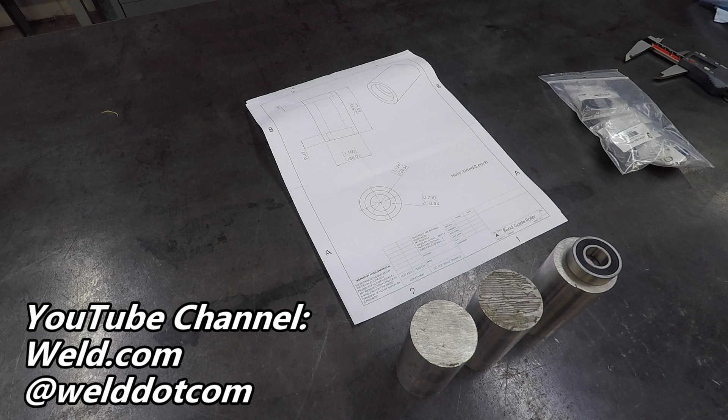All right, we've got another collaboration project. This is one I'm doing for weld.com, the guys over there. We've got 3 pieces here to machine, and what they're building is a guided bend test machine. This is going to be for bending test coupons, test weld coupons.

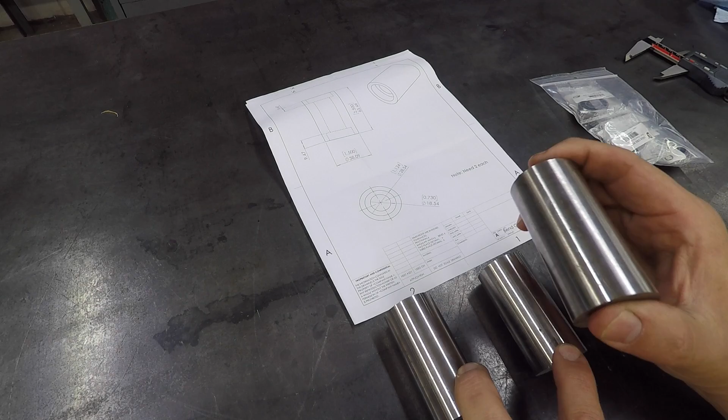What they're going to be doing is they'll have 2 of these pieces on the bottom, and they will roll. We're going to have bearings inside there, and then the top piece we're going to mill a flat on, and it'll be welded to a piece of square stock attached to a hydraulic ram. So what will happen is this will push down, the coupon will be sitting in there, your flat piece will be sitting there, and then this will come down and bend it.

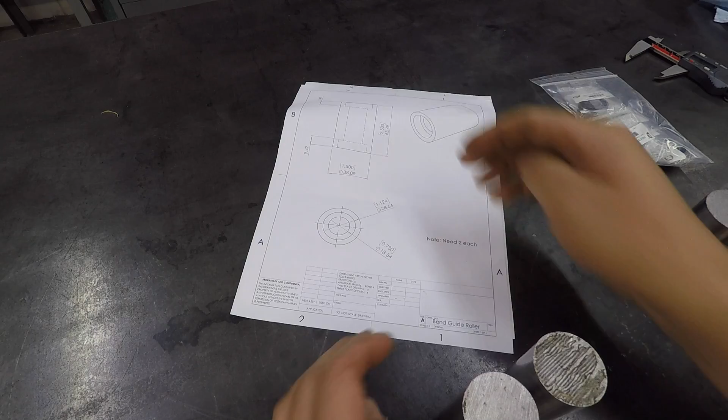So we are going to be making the rollers for them, and they supplied the print with all the dimensions right there, the length. We're going to be making it 2.5 inches long, and then it'll be counterbored on each end for the bearing. All right, pretty simple, straightforward machining.

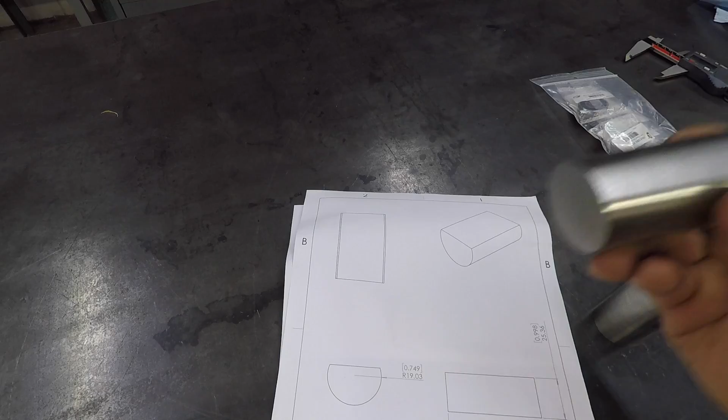And then we've got one more piece. This is going to be for the fixed roller, which will be welded to the piece of flat bar. So we're just going to set it up and mill it so that it's got a flat, and face it to length. That one's pretty simple, quick and easy to do. I might even upset some folks and go over to the shaper and use the shaper to cut the flat on there. So that's it.

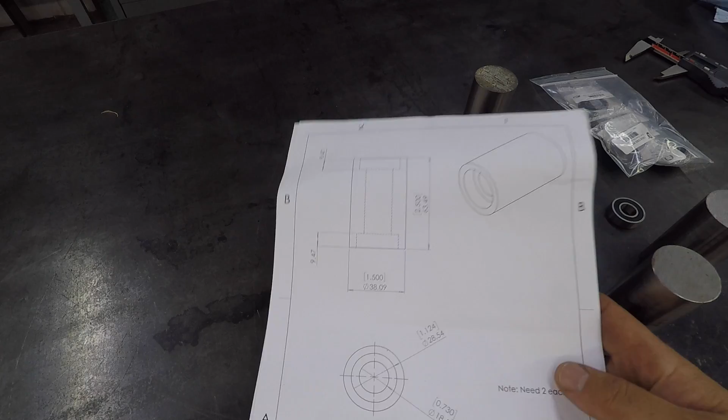Pretty easy stuff. I've had this for a little while, so I need to go ahead and try to get it knocked out so that they can finish fabricating the bending machine.

First op we're going to do is go ahead and get them all faced to the proper 2.5 inch end length. My edge chuck parallels won't actually fit in the 6 jaw right here because it's closing down too small to use that. So I'm just going to use a regular milling machine parallel for the mill vise. I'll lay it in there before we do each one, and we'll push the piece back against that parallel, snug up the chuck, and slide it back out, and I'll do that every time.

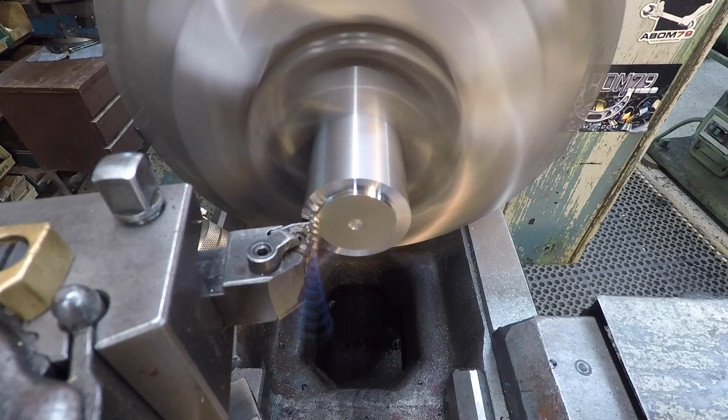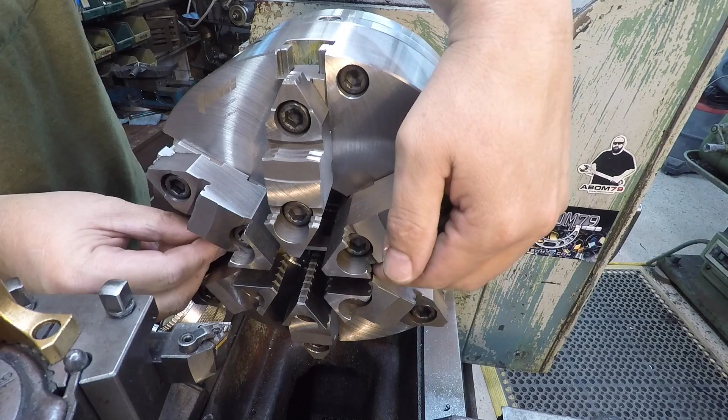So what we'll do is just make one cut across all 3, and then we'll flip them around and finish them to length. We'll make one cut across it just like so, and then we're going to stick our parallel in there again. And then I evenly tighten the scroll chucks like that. All right, ready to make another cut.

Got one side of all 3 of them faced now. I'm just going to take a rough measurement. We're still right at 3 inches, just a little bit over 3 inches. We got a crooked cut there on that end, so they're not going to measure all equally.

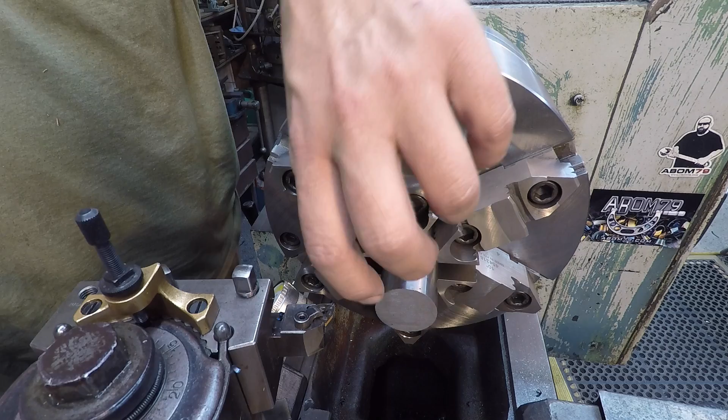But I'll just repeat the exact process that we just did with the parallel here, and just slide them in. What I'll probably do... oh, forgot to take my parallel out there. I was getting ahead of myself. What I was saying, since I've got a half inch to take off this, I can't take all that at once anyway. I'm going to get this one close. I'll pull it back out, measure it, make sure we get the first one on an exact length that we want.

And then I'll have this zero set right here, and then I won't touch it. I'll know I can come into this zero for the other 2. All right, taking sixteenth passes across here.

All right, this first one, we've got it near our length that we want it. Got a little over. I've just been using my hook scale to get me close. So, using the calipers, says that we've got 25 thousandths to come off of it. So this is going to be our final zero set right here. We'll put our parallel back in there.

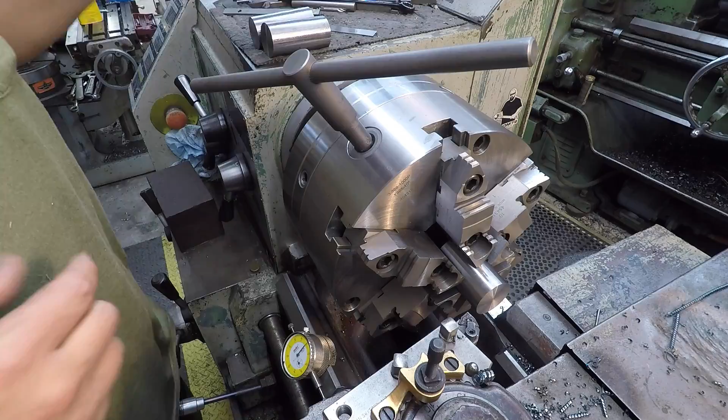Lightly push it against the parallel. Make sure we pull the parallel out that time. All right. So I'm going to move it over another 25 on the dial right here, and I'm going to reset this one to zero. And what I'll do is I've got another mag base like this that I'm going to put on the other side to use to count down to our zero here.

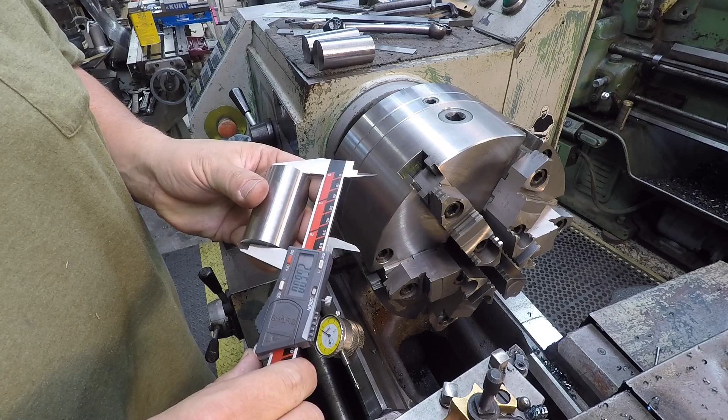Here's our first one that we finished to size. And you can see, using the calipers and the dial indicator, I'm within 1/1000th. Not that that dimension is all that critical, but we know we hit it within 1/1000th there using a caliper anyway. So just going to go ahead and repeat these methods.

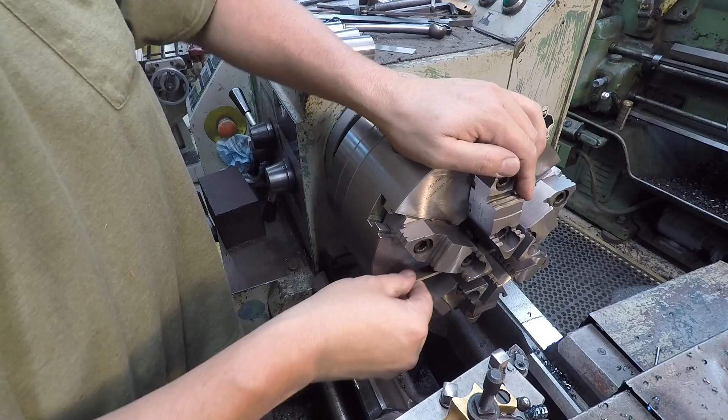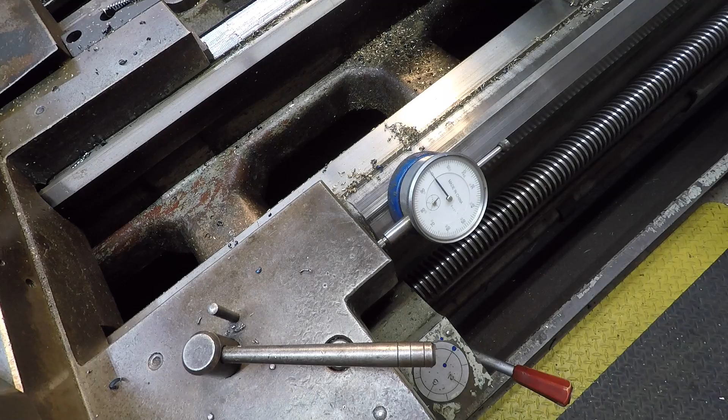As we said, we'll go ahead and stick our next one in there. Saw cut out. And I just got to get another indicator set up on the other side of the carriage here. Touched off the end of the part, got this preloaded, set to zero, so we'll just make our 16th offset and use this to move it that way.

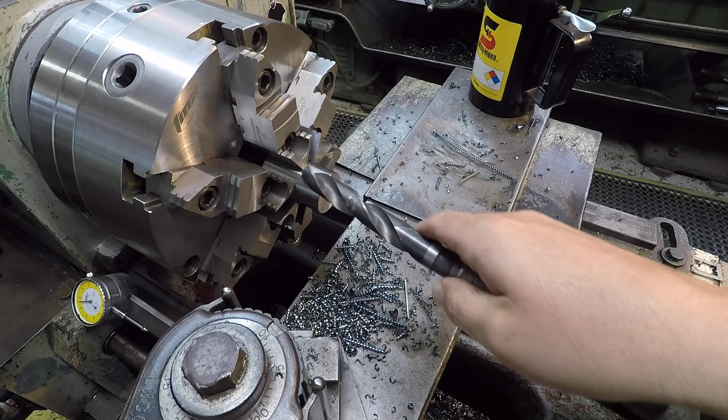Alright, so we got all of our parts faced to length. I went ahead and chamfered them also. So on 2 of them, we're going to go ahead and put our through hole in there. And what we'll do is we'll pilot it with a 3/8 drill through there. And then we're going to drill it with a 47/64 - I just put a fresh grind on that using the Lyle drill grinder. So that'll just be a drilled through hole, and then we'll counterbore each side for the bearing.

Got both of our 3/8 holes through there, so we're going to go ahead and go with our 47/64 now.

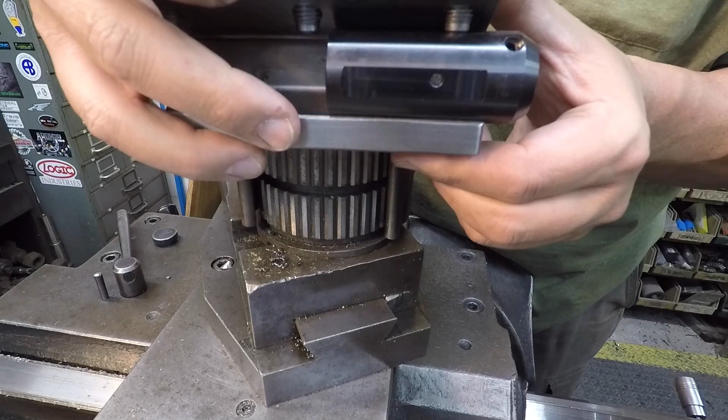All right, for our boring tool today, we're going to be using the Micro 100 Micro Quick tool holding system here, and I've got this little boring bar we're going to use. We're running the 1/2 inch shank tools. This is the one - you push it in there and that pin that's in the back right here actually squares the tool up. And then you tighten the set screw and it just seats it in there and keeps it in place.

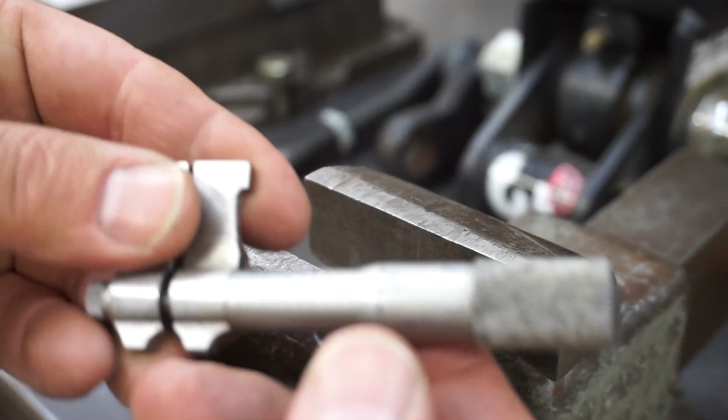This is the mic that I'm going to use today to get the bearing journals bored to size. This was my granddad's - you can actually see his initials right there, JAB. This is a 1 to 2 internal micrometer right there. So I'm going to inspect it and make sure that it's still on.

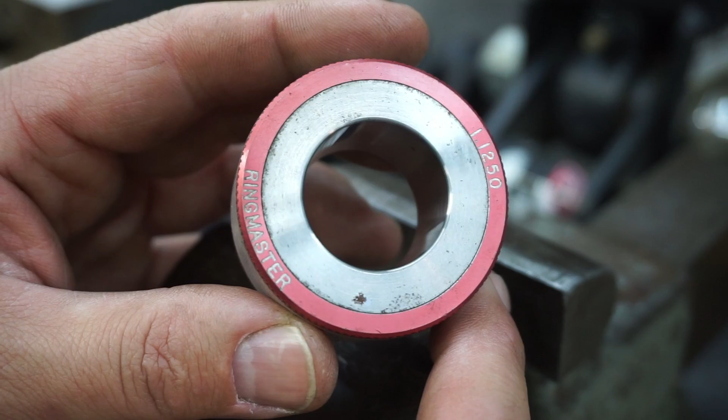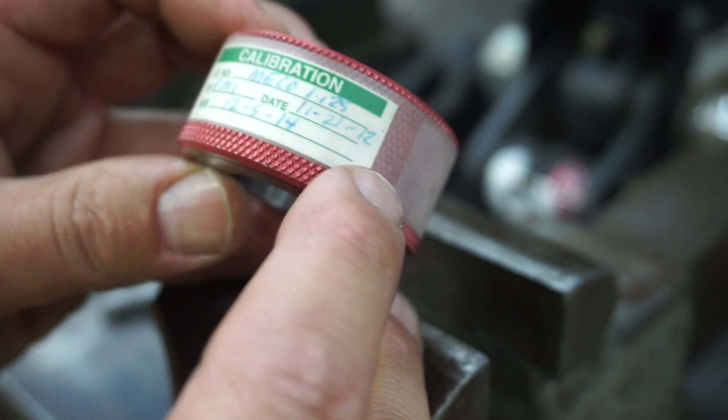I've got this Ringmaster ring gauge here that is the perfect size for that mic. You can see the size right there, 1.1250. These are standardized, you know, so it went out of calibration back in, what, '14, but it's probably still good. So we're going to go ahead, and I'm just going to very lightly clamp it in the smooth jaw right there just to hold it in place.

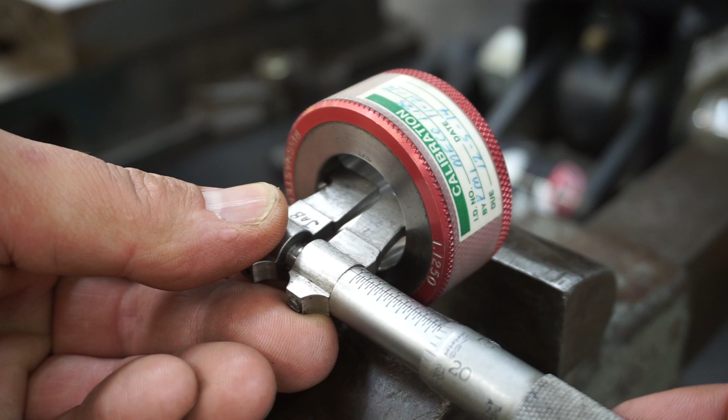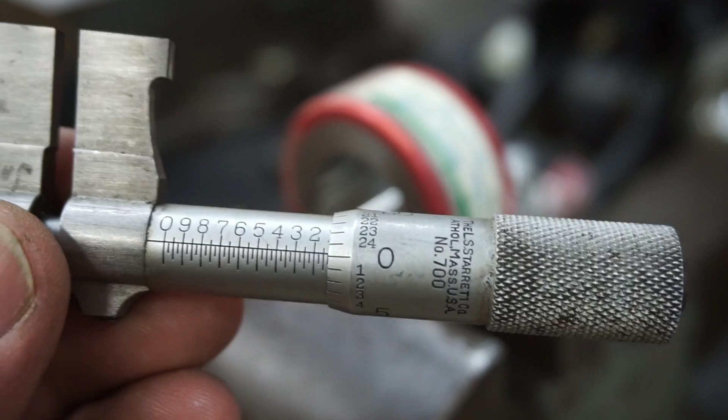We'll go in here with our mic. I don't have any rock there and it's sliding out. So we want 1.125 - it looks like we're right there on it, maybe a couple of tenths shy. Let me try it again and see if I got it right there. When I do this, I'm trying not to look at this zero. I'm not trying to line it up because I want it to line up. I want to get the right feel for the mic inside this ring gauge right here, or standard.

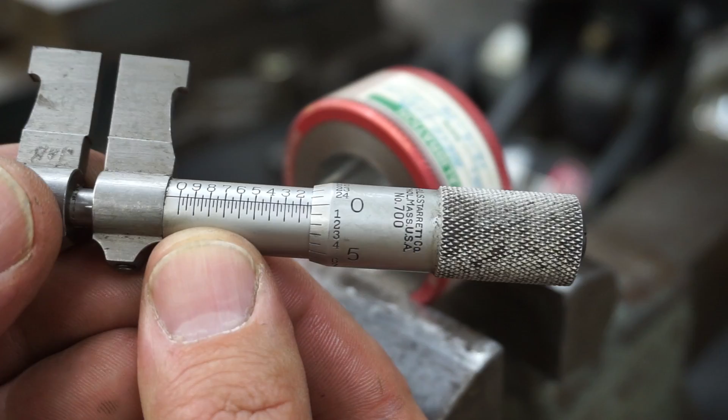And I can move it in and out right there. Let's see what we got that time. So it looks like it's pretty close to zero that time. We may be 1/10 off, but we are pretty good. We're going to go ahead and call this one ready to roll. So we'll go back to the lathe and start getting our piece bored for our bearings now.

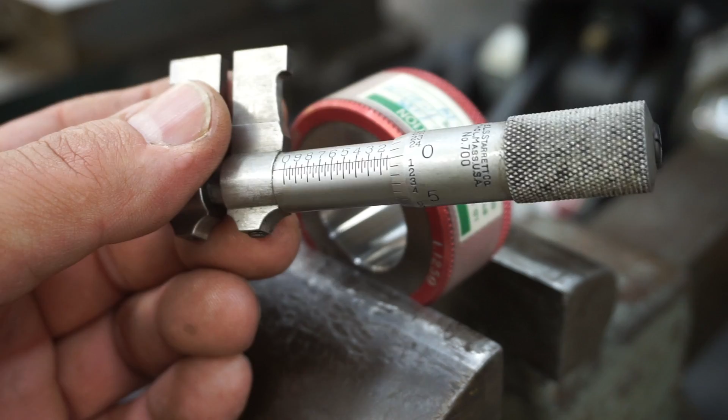All right, we've already got a depth established, so we're going to go 9.47 millimeters deep, or 373 thousandths, right at 3/8. We are ready to go here. Let's see how our micro tool is going to do.

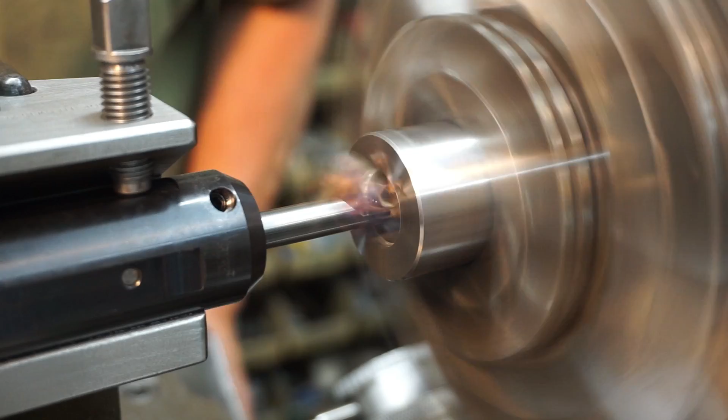Taking 50 thousandths cuts right here. Such a short journal - I'm not overly concerned about that stringy chip, you know, because we don't really have much chip grooving profile ground on that tool. But it looks like it's doing a good job, so I'll just take some cuts like that to get it about down there to size.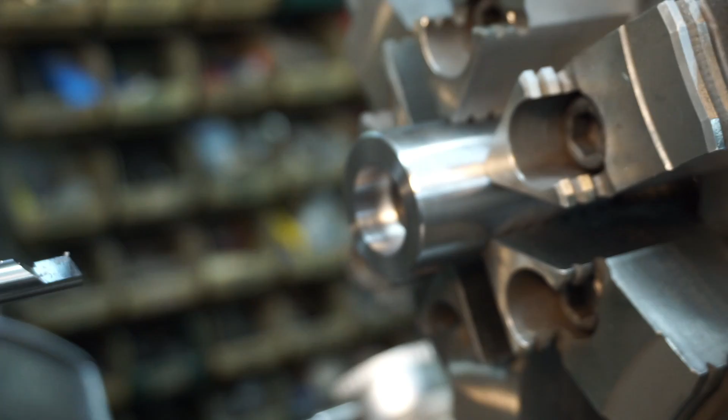I may need to get in there and pull those chips out, but they're going up inside the spindle. So yeah, we're going to be close to 950. Still got a little ways to go here.

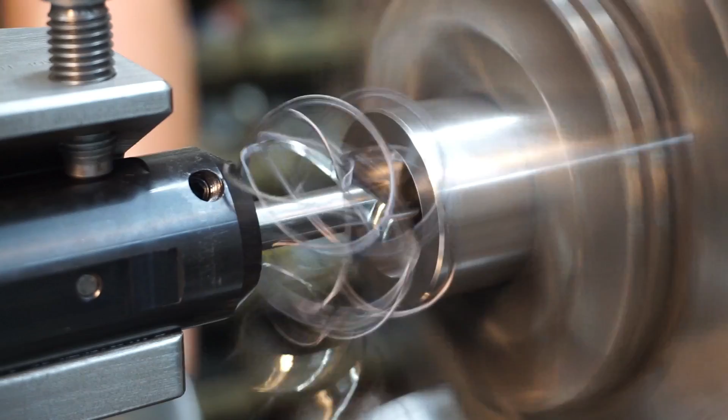All right, we should be sneaking up on our finish here. Let's see about where we're at. So it looks like we're at 1 inch 103, so we got 22 to go. We want to finish it at 1.124 to 1.124 and a half. We want just a little bit of interference so that the bearings actually press in there, so a little bit to come out.

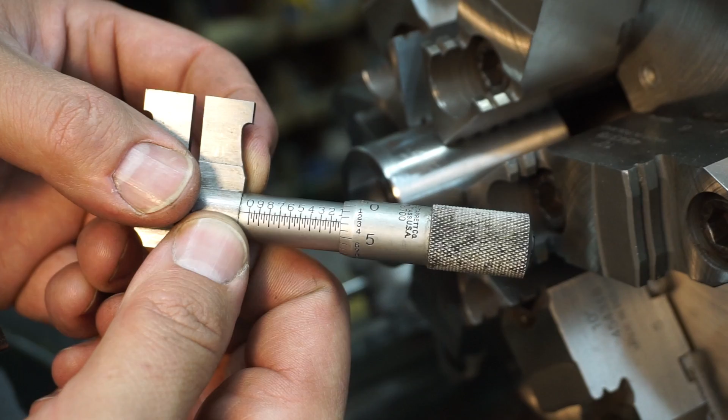I think I'll split it. We're just going to do a 10 thousandths cut here. We'll mic it and then we'll finish it, put it on our finished size.

Just want to get rid of the little fuzzy chips out of there so you're not micing on them. Alright, let's see what we're getting this time. We'll take a couple measurements just to be sure that we know where we're at, just trying to get the mic squared up both ways. Alright, looks like we're gonna have 10, 11 thousandths. Yep, looks like we got 11 thousandths to bring us on our size that we want.

So let's go ahead and take it. It'll be right there, maybe a couple tenths off. And I'm going to go ahead and clean up that face while we're in there. I left myself 4 thousandths to back face it. Like that right there.

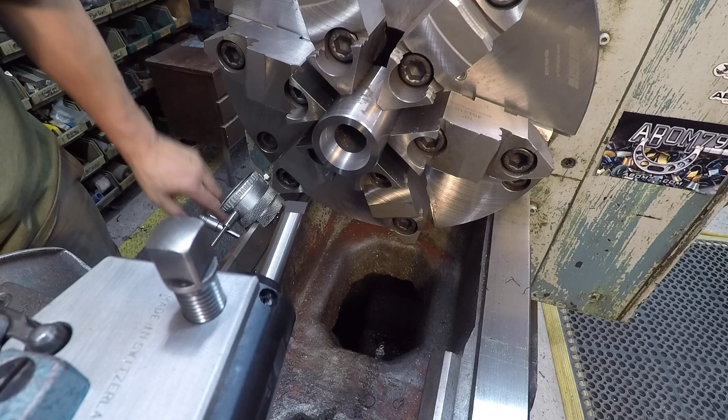The only thing left to do, we need to go ahead and put a chamfer on there. We need to chamfer this and that inner bore to get rid of that sharp edge. All right, we swapped out my boring bar for a threading tool and got it kicked around a bit of an angle. We'll go in there and use that threading tool to break that edge. I'm actually contacting Micro 100, looking at their catalog to see if they make an actual chamfering tool so we have like a 45-degree angle where you can just stick it in there, leave your tool set where it's at to be able to come in and break those edges.

Just want to knock the sharp corners off is all we're doing. Just like that. So we'll go ahead and take this guy back out.

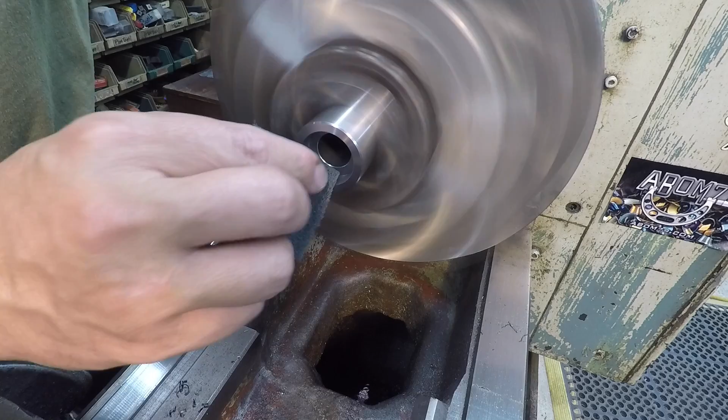One last little thing, we'll take this gray Scotch-Brite and just kind of soften up that chamfered corner, just like that. Clean the face up, make it look nice and pretty. All right, and that is finished up right there.

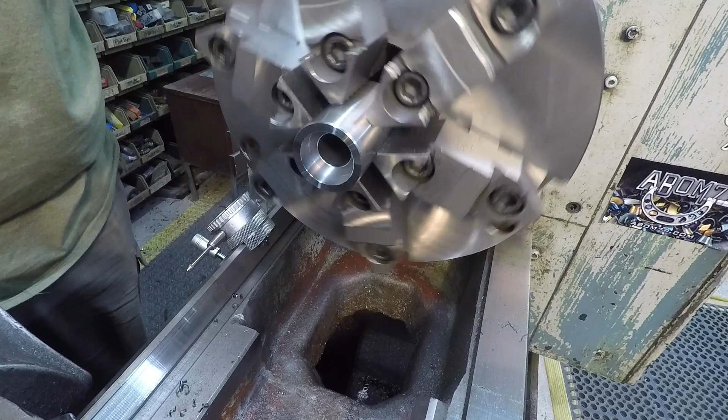So, not going to bore you with repeat steps. What we're going to do is take the part out. We're going to flip it around, and I'm going to keep doing the same thing 3 more times that I just showed you right there. So I'm going to bring it back whenever we get to the other. This piece here is the one that we're going to mill the flat on, so I'll bring you back whenever we get to the shaper, okay?

I'm just getting to the last hole. I got to flip it around, but I wanted to show, see, another benefit of having these types of small carbide boring tools is you can easily touch them up yourself. So I noticed on this last one, it was starting to squeak a little bit more on me as I was finishing it out, and after I finished it, I pulled it out, and I could tell that the corner had started to get burned a little bit.

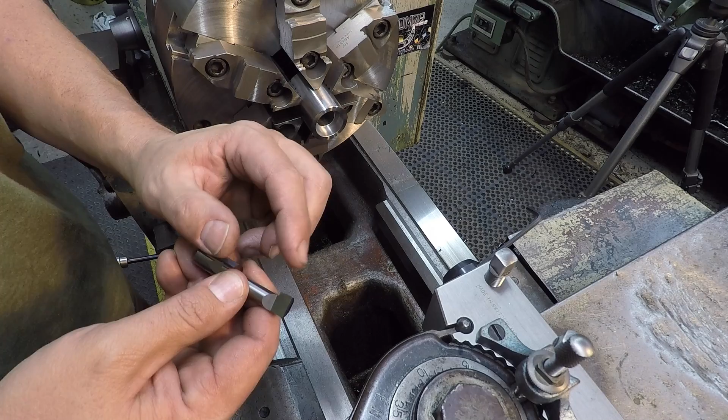You know, it was rolling over, so I went over to the Baldor carbide grinder and touched up this edge. I just went against this face to bring this edge further in. I didn't touch this face here or the top. So I just relieved this and then broke the corner again. So that's just one of the benefits of having that solid carbide.

You can go over there and, if it gets dull, which is usually just a corner, you can go touch it up yourself and then keep on going.

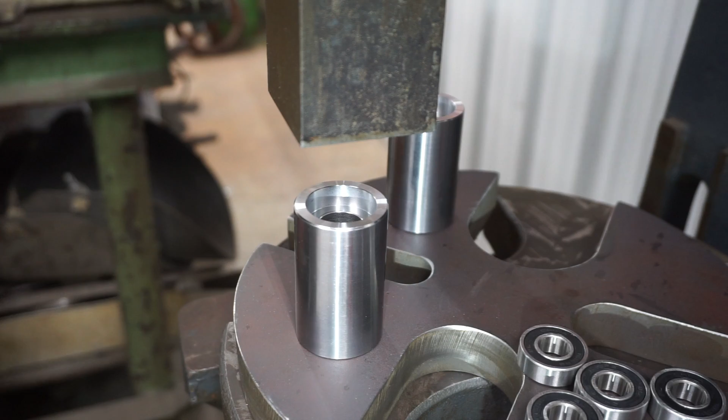We got you over here on the big arbor press, and we're going to go ahead and press the bearings in. I did confirm with Jason if he wanted these pressed in, and he said yeah, that'd be great. So let's go ahead and push them in there.

Bring the ram down to kind of square the bearing up. Doesn't take much, and there it is.

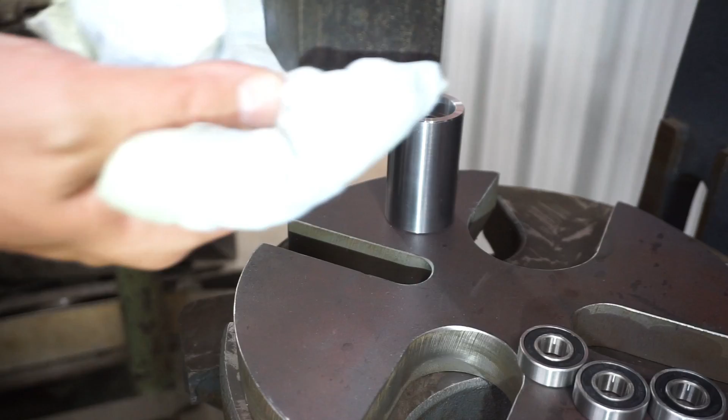That looks like some trash on the bottom of the ram. Let me get a rag and just kind of wipe that a little bit. I thought I cleaned it off. I think it's got a little bit of rust down there on the bottom.

Easy does it. All right, one more to go.

That one I actually used the hand wheel to press it in there. This one ended up being half a thousandth bigger than the other holes there. I knew there was one that was a little bit more loose than the others.

Okay, there we go. Those two are done, finished up. So now we can go ahead and take our third piece to the shaper and get that flat cut on it.

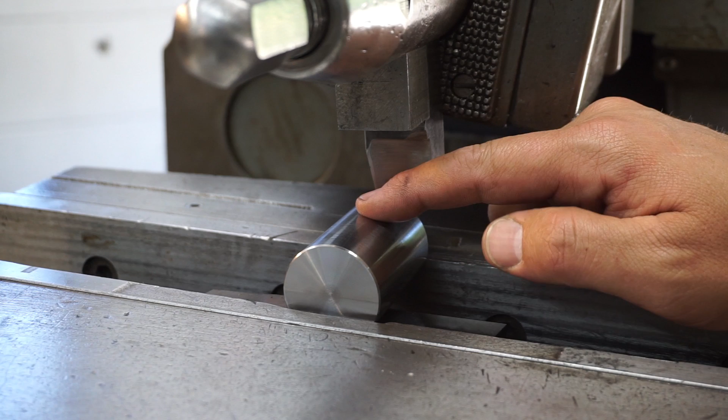All right, we're set up in the shaper vise, and what I want to do is just establish a top dead center touch off right there. I'm real close, so I'm going to take the table and just kind of run it back and forth.

Move it down a couple thousandths at a time and see if we get a touch off there. All right, there we go. It's touching it. Yep, we got a little touch right there.

So we'll be taking a total of half an inch off this right there. We'll probably just do it in two cuts. I'll just dial down a quarter, and then we'll measure it, and then we'll take whatever we need to finish it out in the second cut.

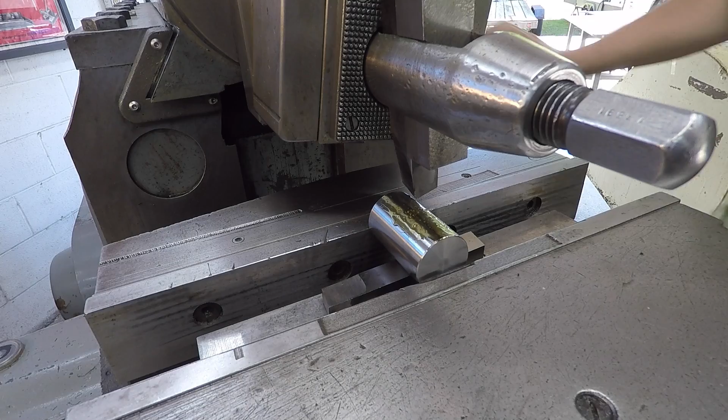All right, here we go. We'll do a 20 thousandths step over, quarter inch depth of cut.

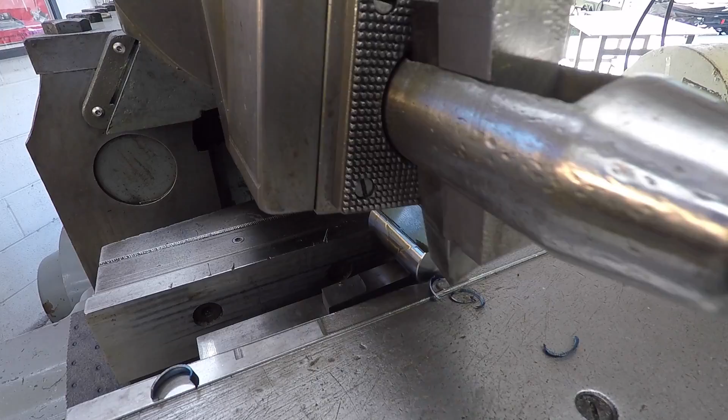See how nice and easy that was? Nothing to it. We'll move it over so we can get a measurement on it.

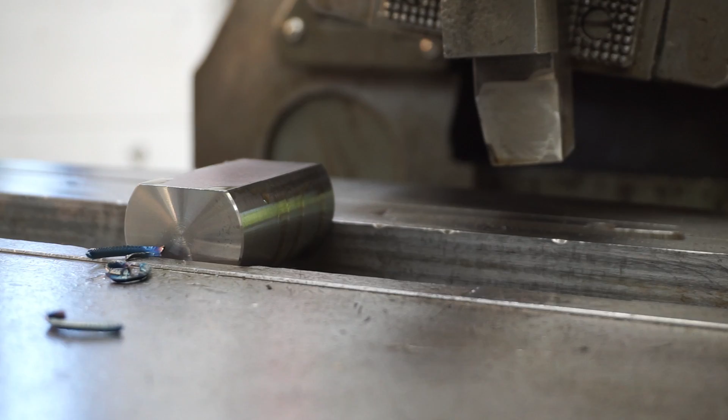This isn't a super critical dimension here just because we're going to be welding that to a bar. But their spec was 1 inch on the thickness here. Trying to get the radius there on the bottom, make sure we're centered up on it.

All right, looks like we got 200, 25, 35, 40, so we've got 242 to come off for our second cut.

All right, we got our depth set. We'll use some of our dark cutting oil here. And we are ready to go.

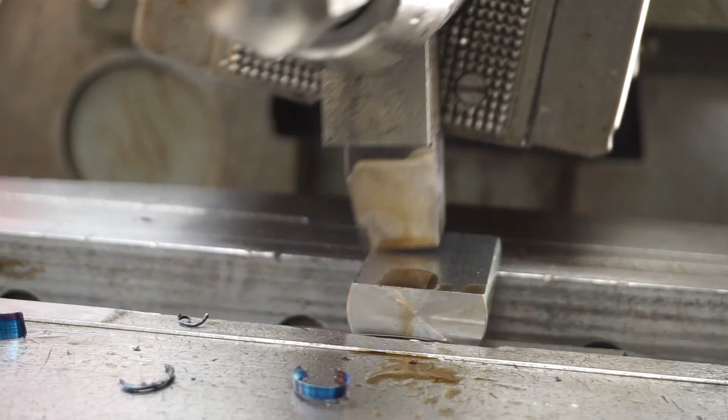Pretty good. So looking like I'm getting .999.

So we're right there where we need to be. The print actually calls for 1.000 on the thickness, but not really hurting anything right there. So we're good here. Just got to take it out, deburr the corners, and we'll be finished up.

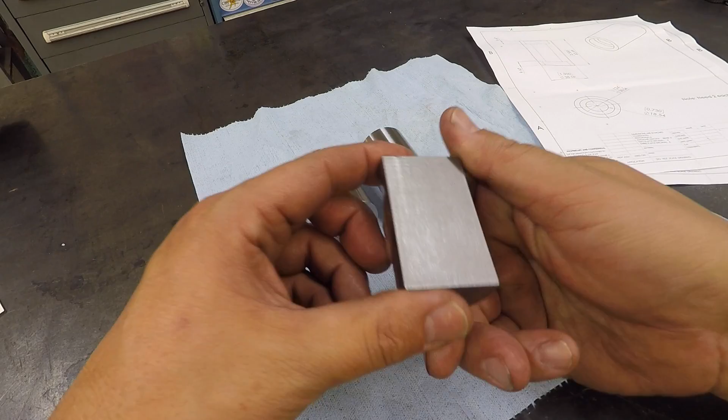All right, guys, we're finished up with all of the parts for weld.com. Got our two rollers there finished up with our bearings, and then this is our part that we just cut in the shaper. I always love the way those shaper finishes look.